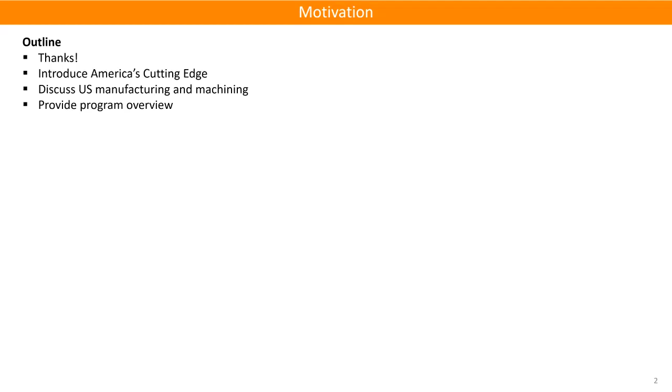America's Cutting Edge, or ACE, is a national initiative for machine tool technology development and advancement. It is supported by the Department of Defense Industrial Base Analysis and Sustainment, or IBAS program, and is based at Oak Ridge National Laboratory's Manufacturing Demonstration Facility. The program is managed by IACMI, the Composites Institute. Here's a quote from the IBAS program director, Adele Ratcliff, who says ACE is intended to help the United States recover the technical and manufacturing leadership position and enable our ability to design and make the machine tools required to produce so many of the products used in modern society.

So you might ask the question, why should I be interested in manufacturing and machining? Let's explore that.

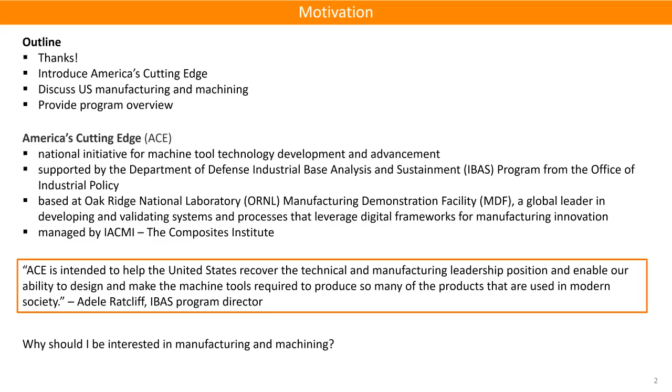First, you'll be in good company. Here are some leaders you might have heard of in innovation and manufacturing. Dean Kamen, inventor of the Segway. Steve Jobs of Apple fame.

Dr. Robert Jarvik invented the first artificial heart and understood how important it was to be able to manufacture as well as design that heart.

Jony Ive designed the iPhone, the iPad, the MacBook. Chances are you might be using one of those devices right now, and certainly today you might have encountered one of those devices. He's holding some machined aluminum components in the picture.

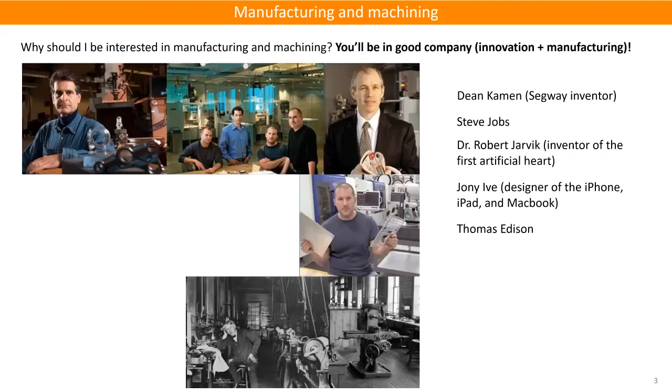Thomas Edison was a firm believer in manufacturing to enable innovation. William Hewlett and David Packard of Hewlett-Packard fame used machining. Elon Musk understands the critical role of manufacturing and machining in his innovation.

And finally, Eddie Van Halen, guitarist for the rock group Van Halen. You see him here machining one of the bases for his custom guitars.

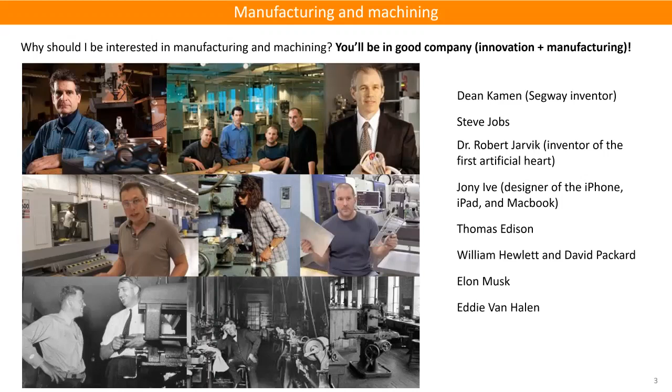So why should you be interested? Because you're needed. There are unfilled positions in the manufacturing industry today. In fact, a study says up to 2.4 million manufacturing jobs may be unfilled by 2028. There is room for you in this industry.

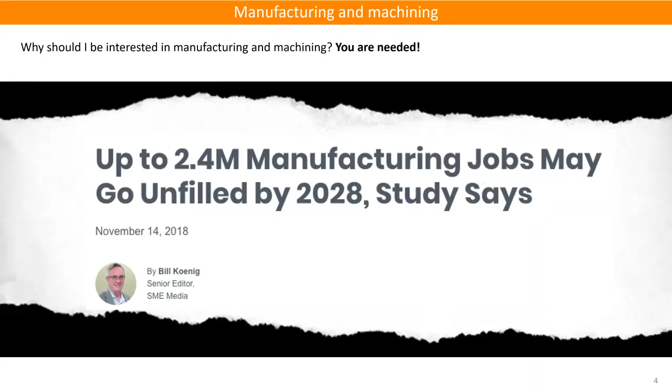Manufacturing is all around you and it's pervasive. Let's look at this video that talks about the importance of U.S. manufacturing.

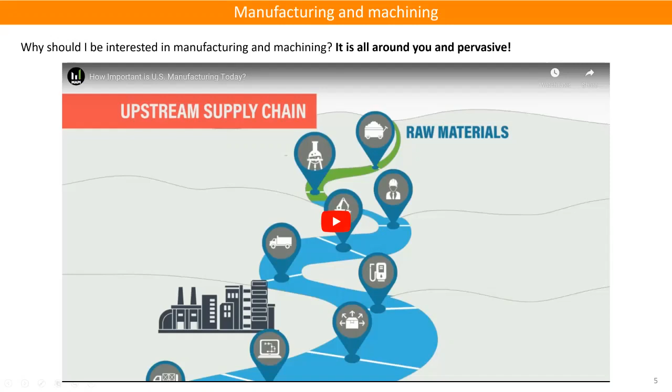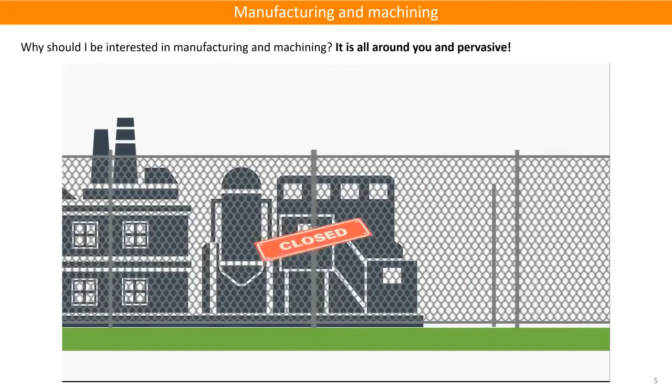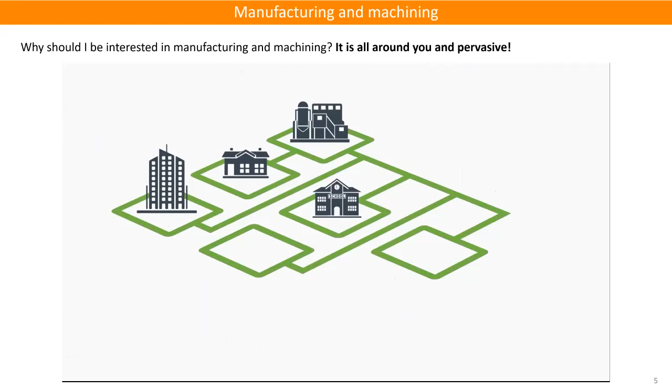How important is U.S. manufacturing today? A lot of people think nothing is made here anymore, but they're wrong. Products designed and made in America touch every aspect of our lives, our homes, our businesses, our schools, our hospitals, our churches. They make possible everything we do, whether we're driving, exercising, reading, eating, sleeping, or simply lying on a beach.

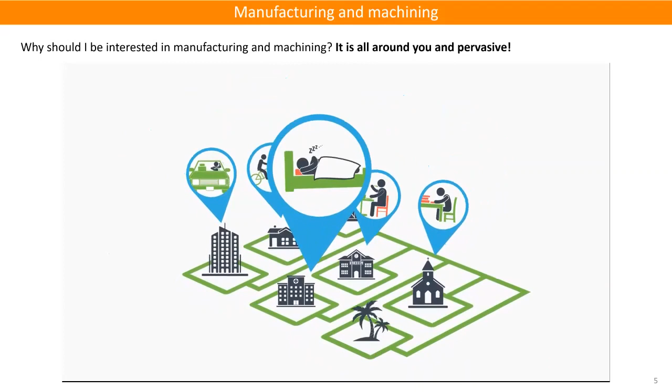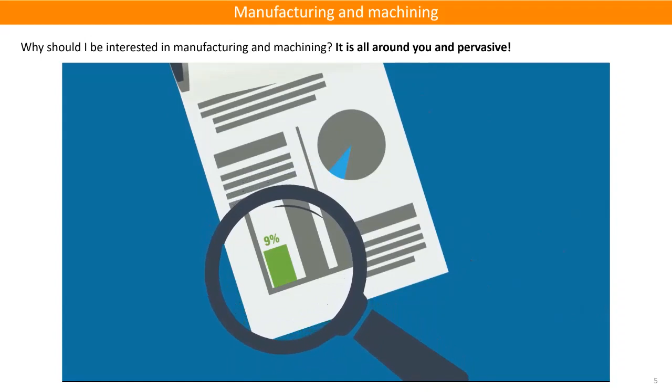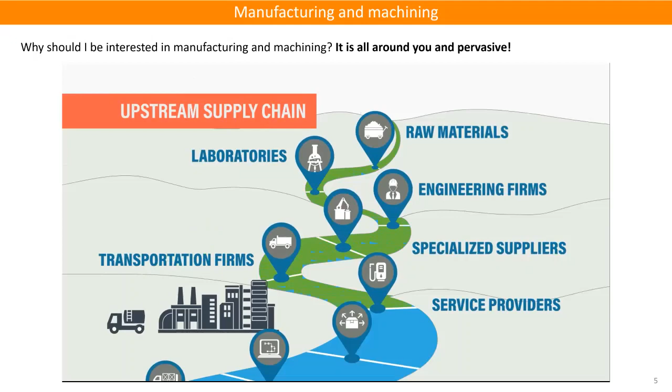In fact, the American manufacturing sector is much, much bigger than you might think. Official statistics tell us manufacturing represents 11% of today's economy and 9% of the American workforce, but this underestimates the sector's full impact. To measure the actual manufacturing value chain, look at the whole process of getting a product to market. It starts with a manufacturer's upstream supply chain. Miners, scientists, engineers, specialized suppliers, transportation firms, and other service providers are all involved in the prep for the factory floor. A lot of labor, skill, energy, resources, services, and process management goes into making the product in the factory.

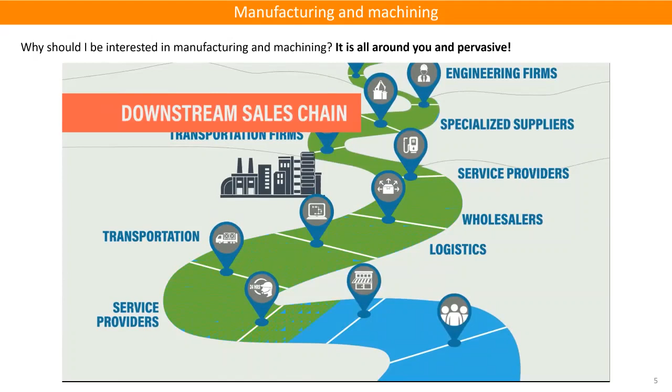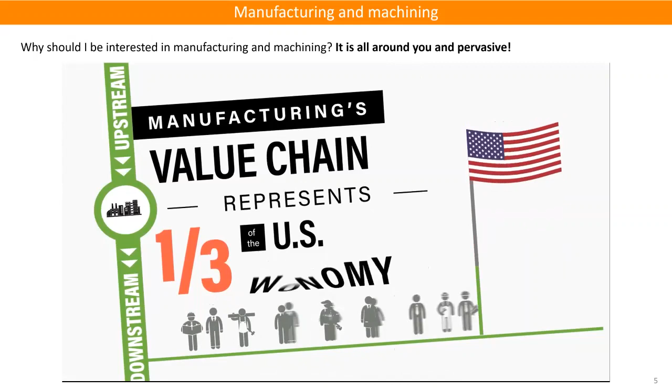Then, once the product is sitting on the loading dock, a large downstream sales chain jumps into action to ensure it's available for customers to buy. These include wholesalers and distributors, specialists in logistics, more transportation firms, professional service providers, and retail stores. All in all, manufacturing's value chain is much larger than official statistics suggest. It actually accounts for more than one-third of the U.S. economy, and the people who work in this value chain represent one-third of the country's workforce.

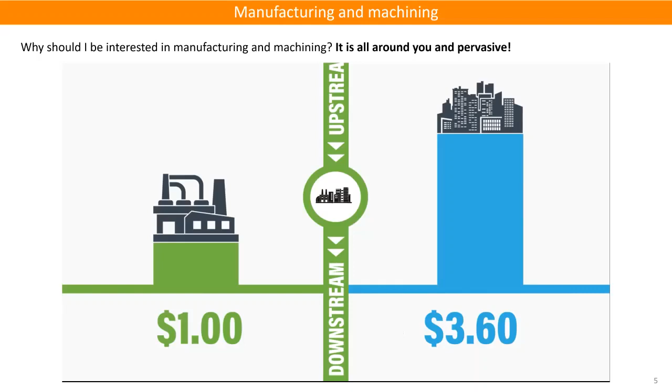Just as important, manufacturing's value chain has enormous impact on society. For every $1 of manufacturing value created here, $3.60 in additional economic activity is generated across the rest of society. No other sector can match that. Put another way, each manufacturing job created in this country leads to 3.4 jobs in non-manufacturing industries to take a product from start to finish.

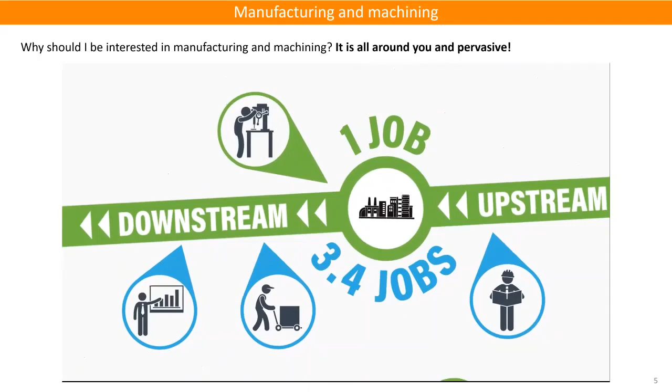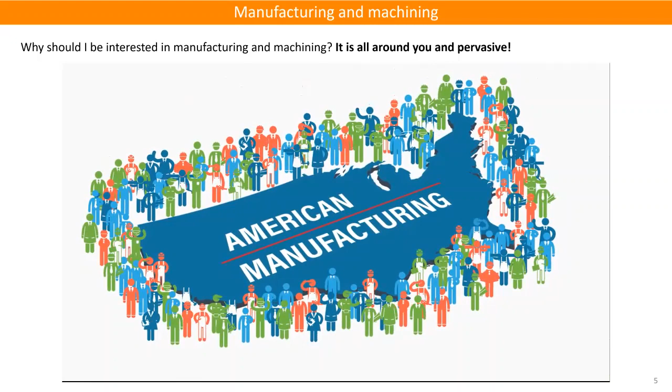So next time someone says, 'We don't make anything here anymore,' set them straight. American manufacturing is vast and remains one of the most influential sectors in our 21st century economy. To learn more about manufacturing's vital role in our lives, visit mapi.net/multiplier.

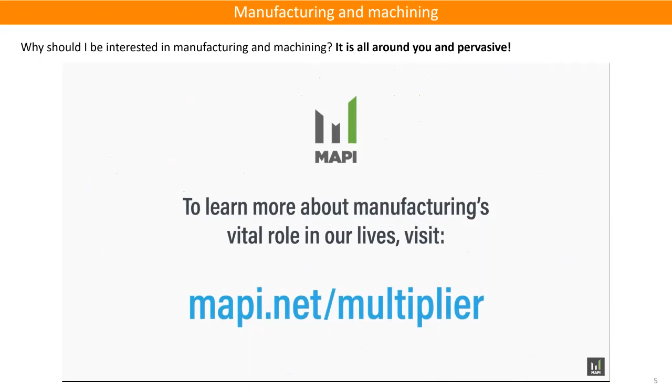Okay, so we've seen the big picture of the manufacturing supply chain and how it affects the U.S. economy. Let's narrow our focus a little bit to Red Bull Racing and a single bolt on a race car.

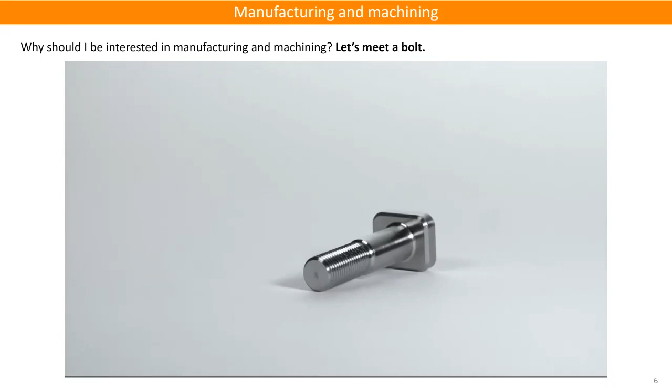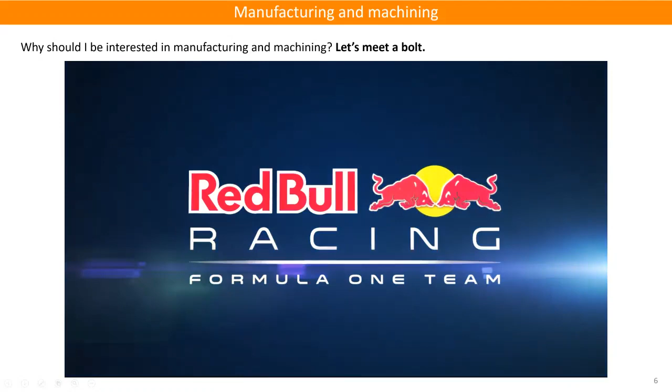Yeah, so that was exciting, right? We see a digital design process followed by CNC machining operations and then measurement operations to ensure that the final part met the design specifications, and then finally its end use. So we enable a car to race around the track through these manufacturing operations.

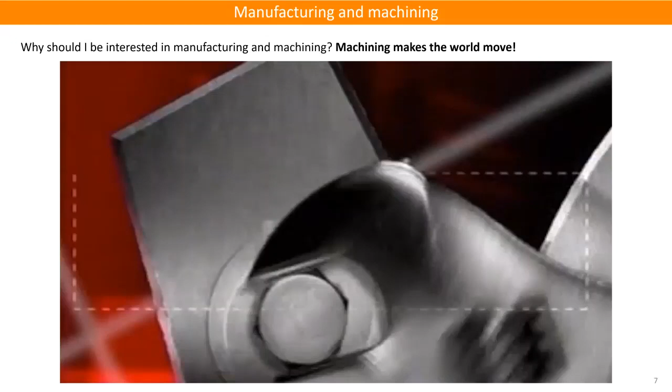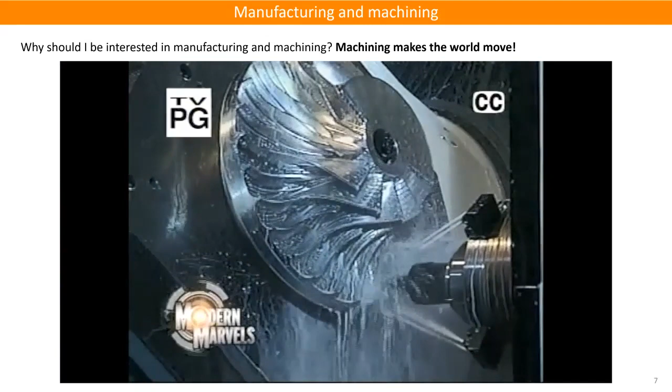Let's look a little more detail at machining itself. No one wants a handmade engine block or jet turbine. We want precision things made by machines. Machine tools built our modern world. Our lifestyle wouldn't exist without them. Now, machine tools on Modern Marvels.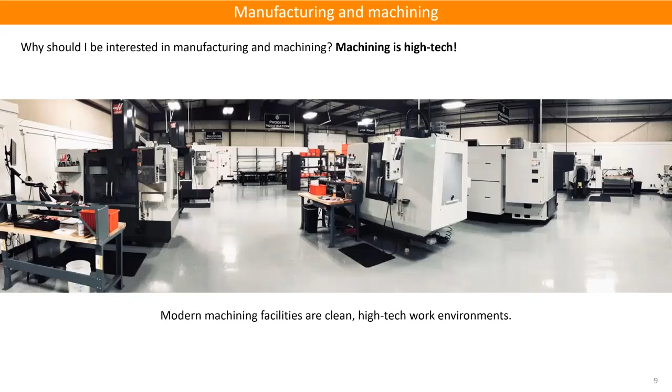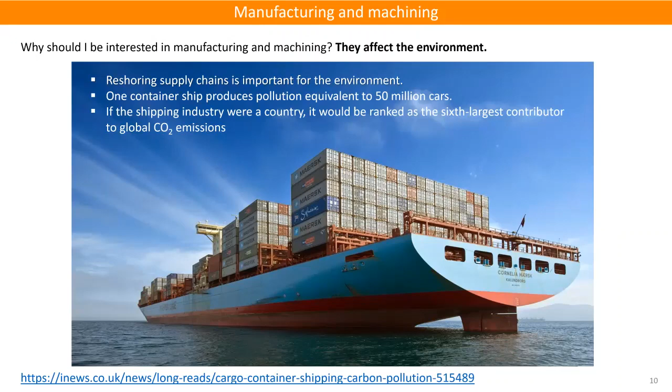Okay, so hopefully we've gotten motivated to be interested in manufacturing and machining in particular. And so that would lead you to join the ACE CNC machining training program. So what is that? Well, there's two components. There's an online component that you complete at your own pace on your own computer. And then there's an optional in-person training, which we're scheduling for summer 2021. For the online component, it includes about 6 hours of instruction, and it's composed of several modules.

There's a machining tutorial, which covers topics that let you become familiar with machining. Second, there is computer-aided manufacturing, or CAM, instruction through multiple lessons that let you perform the operations necessary to machine an example part. After you've completed that CAM instruction, there's a machining dynamics tutorial where we learn the importance of considering machining vibrations when selecting the parameters in that CAM software. Those machining dynamics lessons leverage CAM Plus, an app distributed with the training that enables you to simulate machining performance on your computer, so it's like you're at the machine tool without being at the machine tool. Finally, there's an introduction to machining costs so we can understand the influences of things like tool wear, the machining parameters you selected, and the role of vibrations in cost.